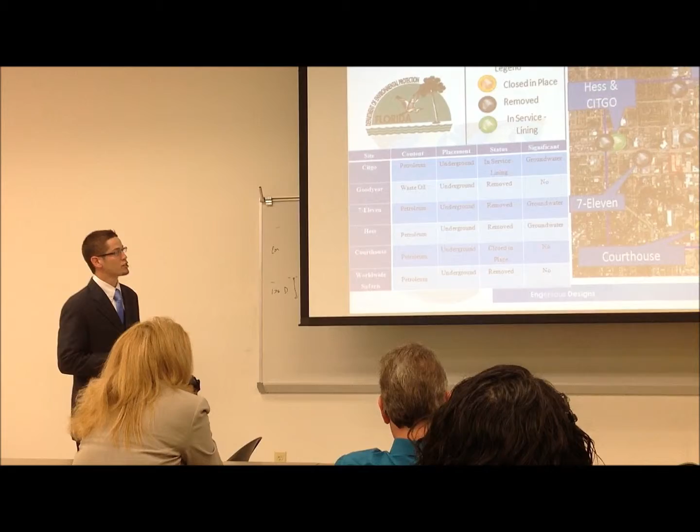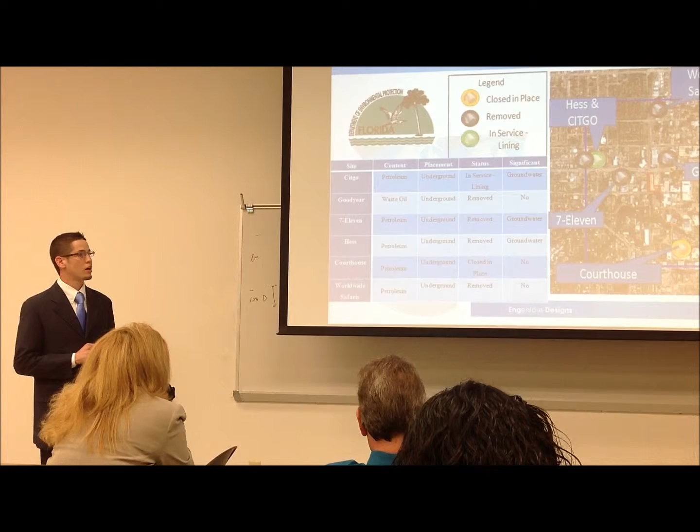During the search of the state environmental records, we came across these tanks here: the Worldwide Safari, Goodyear, Courthouse, 7-Eleven, Hess, and the Citgo. All these tanks, except the Citgo, have either been closed or removed. The Citgo gas station is currently using their tank, which has been lined.

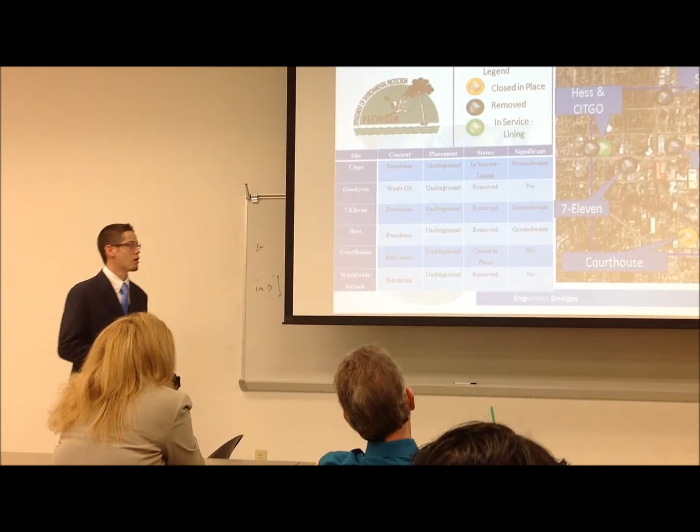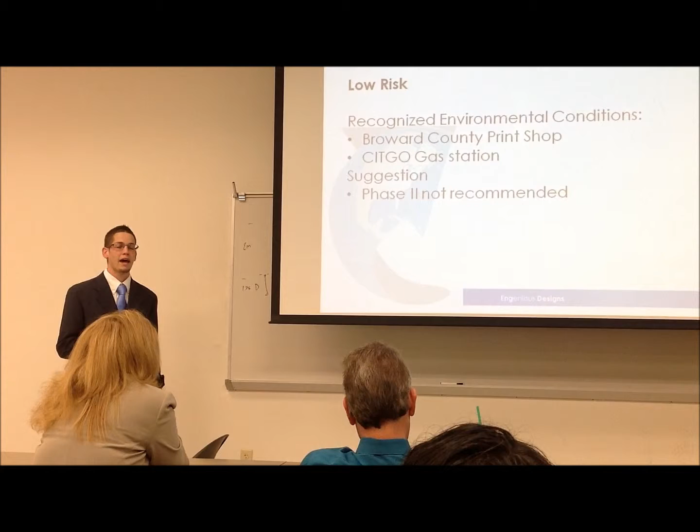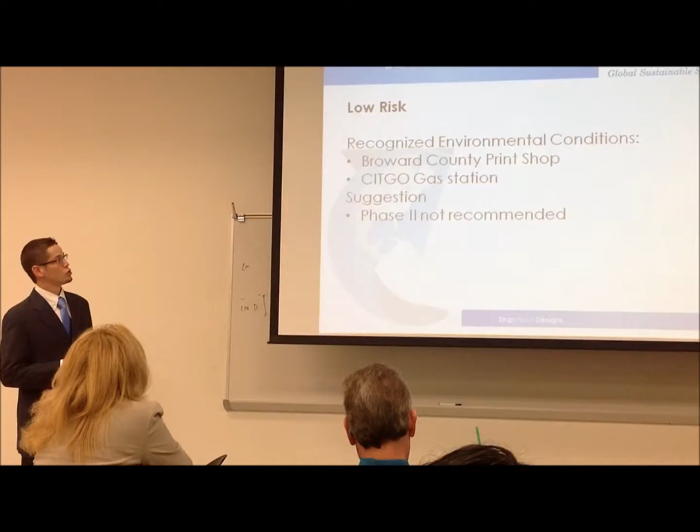So that is the thing we are concerned with, if the lining could somehow come off. In conclusion, we classified our site as low risk, due to the fact that most of the tanks that had leaked have had their petroleum products dissipate in the soil. We chose to recognize as environmental conditions the Broward County Print Shop and the Citgo gas station, for its diesel generator and for the Citgo gas station having its lined tank. Our suggestion is to not proceed with phase 2.

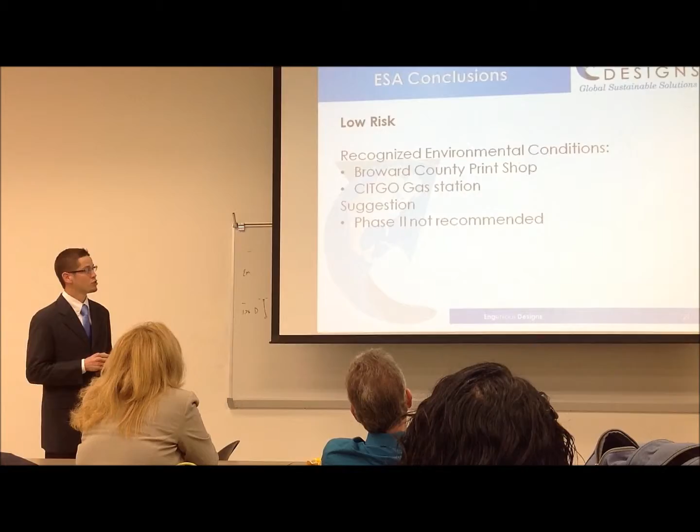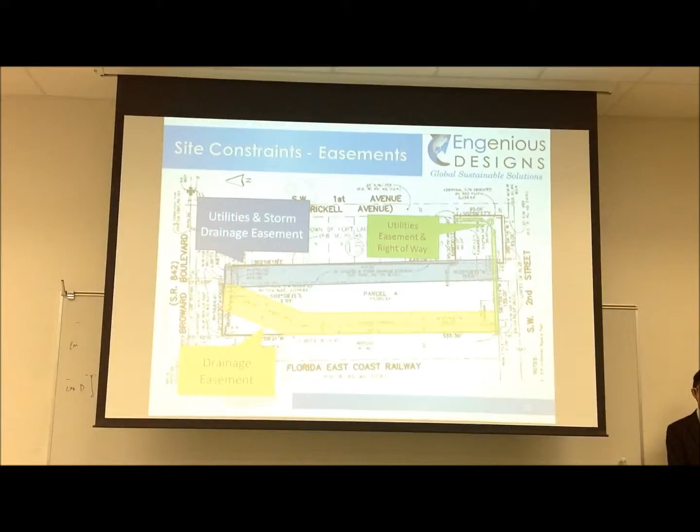We have looked into the site constraints of our property, and the main site constraints are the 3 easements. As you can see in blue, there is a utility and storm drainage easement located on the east edge of our property. There is also a utility easement and right-of-way located on the south and east of our property. The last one is the drainage easement located on the west edge of the property, shown in yellow, and this easement requires at least 25 feet clearance.

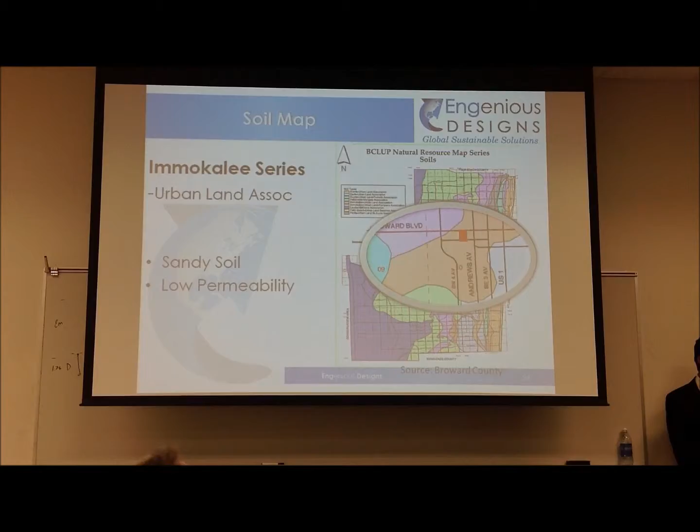For the existing site conditions, we have looked at the maps of soil, stormwater, water main, and sanitary sewer for our site. On the soil map, as you can see, we are located in the red box. We are located in the Immokalee series, which is a sandy soil of low permeability.

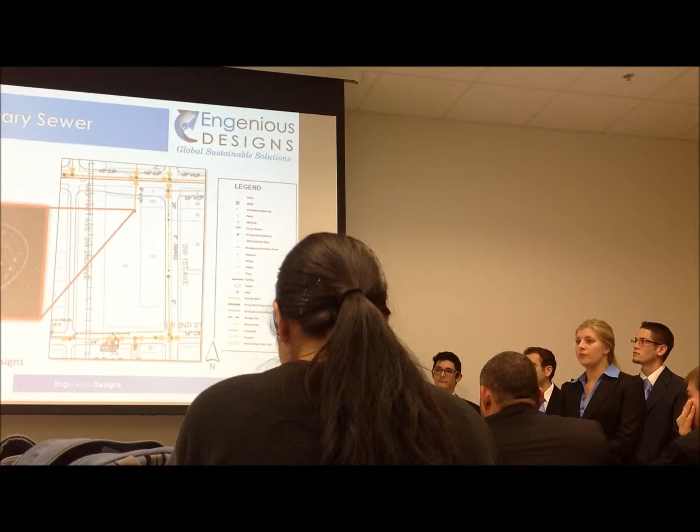For the sanitary sewer, we also pulled up the utility map of Fort Lauderdale, and the sanitary sewer runs directly north and directly south of our property. There's a picture of the sewer manhole taken during the site reconnaissance.

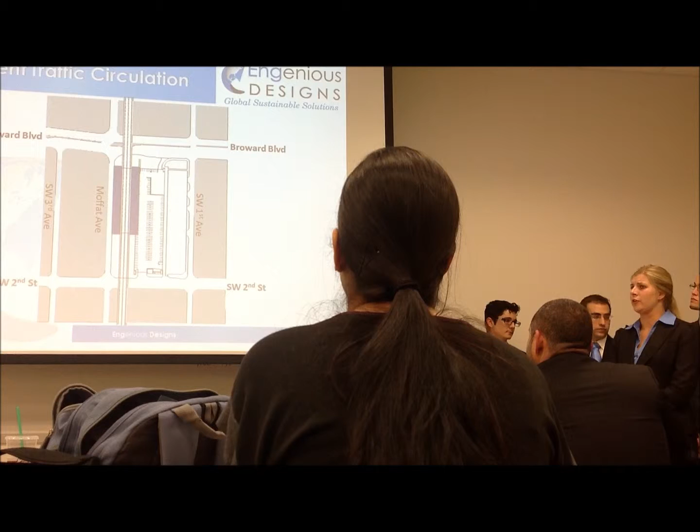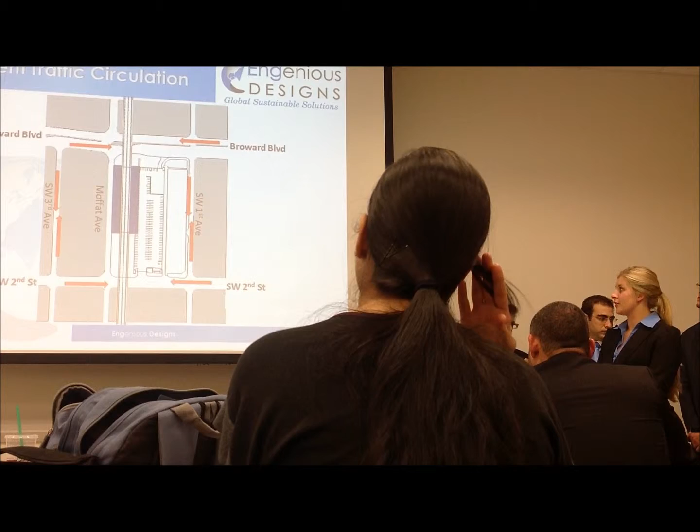Let me tell you a little bit about our traffic circulation around our site. As you can see, all the main roads run in both directions, except for Moffat Avenue, which is a one-way street that runs only south.

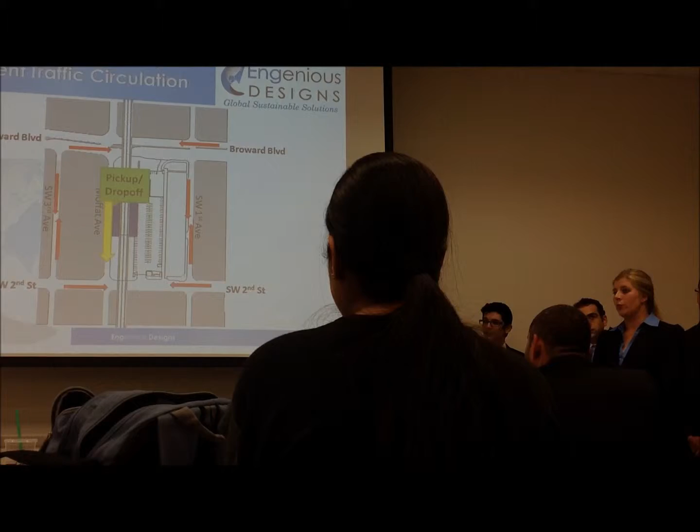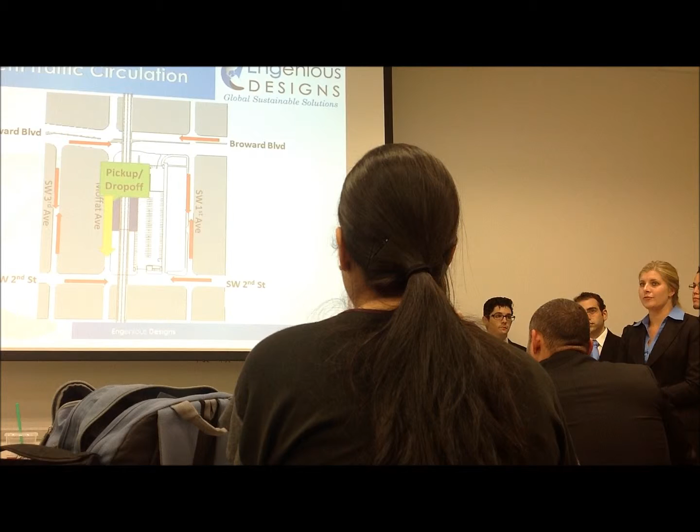This is a pickup and drop-off area proposed by us, located on the west side of the west platform. The direction of traffic on Moffat Avenue is creating an issue for the pickup and drop-off area, because once you're picking somebody up, you want them to exit on the right side of the vehicle. With the current pattern, they're going to exit on the west side of the drop-off area, which doesn't work and creates safety issues.

Another issue we have looked into is a turning pocket located directly north of the parking lot. When we turn to another slide, we'll tell you more about that condition.

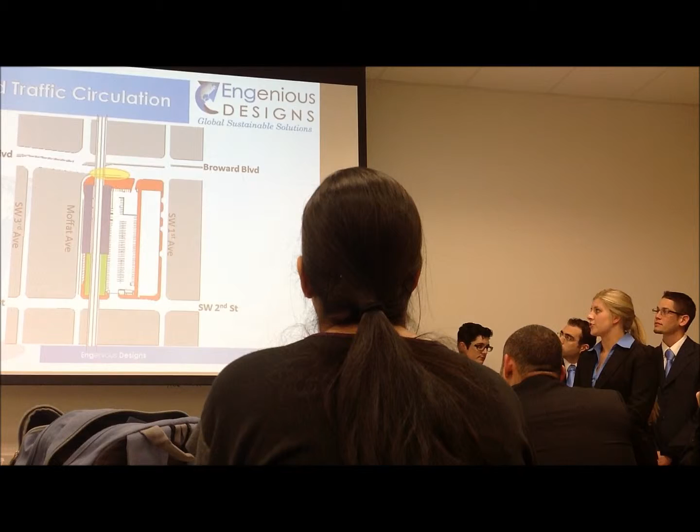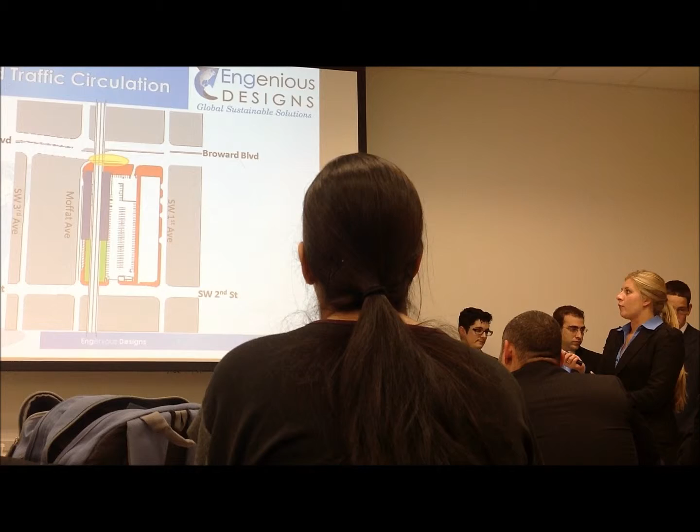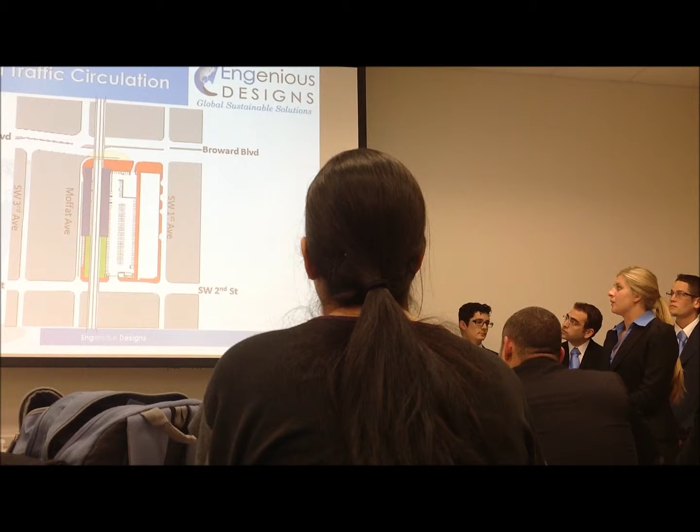There is a turning pocket that goes from Broward Boulevard into Southwest First Avenue. We are proposing to extend that pocket to essentially have a turning lane that goes from Moffat Avenue into Broward Boulevard. The reason is because we want to reroute traffic on Moffat Avenue so it could run one way north.

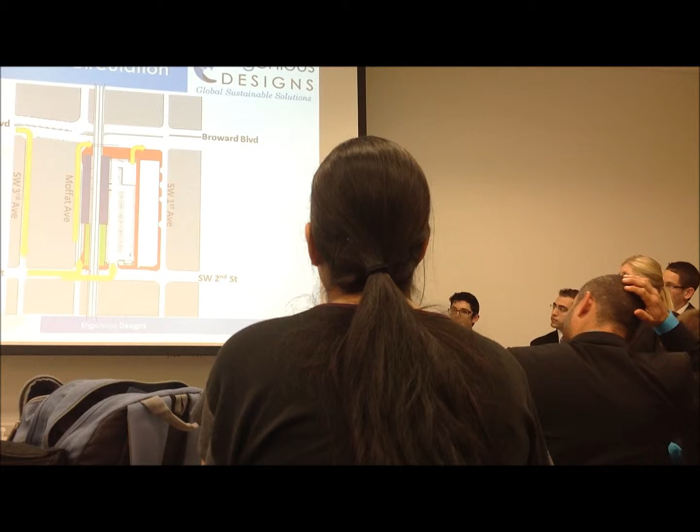That way, once you want to drop off or pick up somebody, you can go from Broward Boulevard into Southwest 3rd Avenue, Southwest 2nd Street, drop somebody off or pick somebody up, and go back into Broward Boulevard. Or another option is to access the garage and go onto Broward Boulevard Avenue.

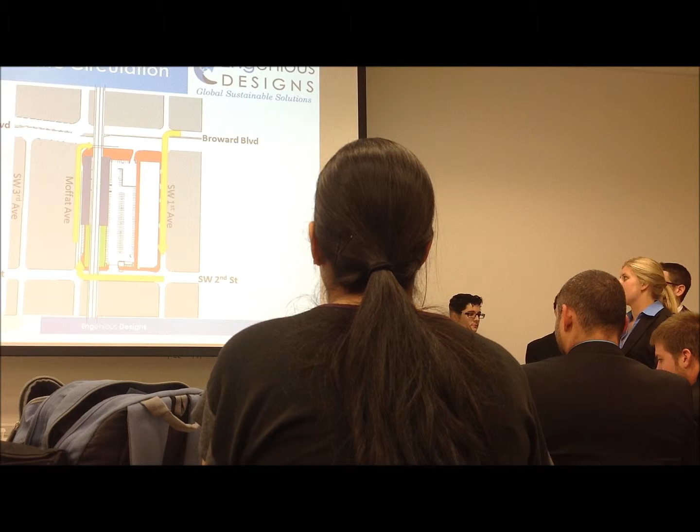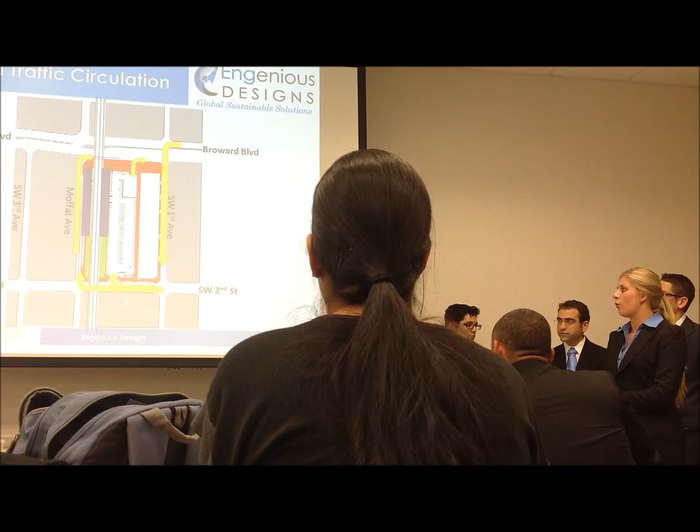Same thing for Broward Boulevard going westbound. You would have to go directly around the property to Southwest First, Southwest 2nd Street, and go around into Broward Boulevard, or go into the parking lot and go Broward Boulevard eastbound.

Now Joe is going to talk to you about the objective section. These are the people that we're going to be transporting. And as you can tell, they're very happy.

The morning peak is from 6 a.m. to 9 a.m., and the afternoon is from 3 p.m. to 6 p.m. The reason it's a little earlier is because the government center usually lets out earlier. Government employees tend to finish around 4, sometimes leave earlier, so we'll be expecting it around that time.

During the average 15 minutes, we expect around 200 occupants from the current ridership. In the future, we expect a little bit more, probably around 600 to 800 during that peak 15 minutes.

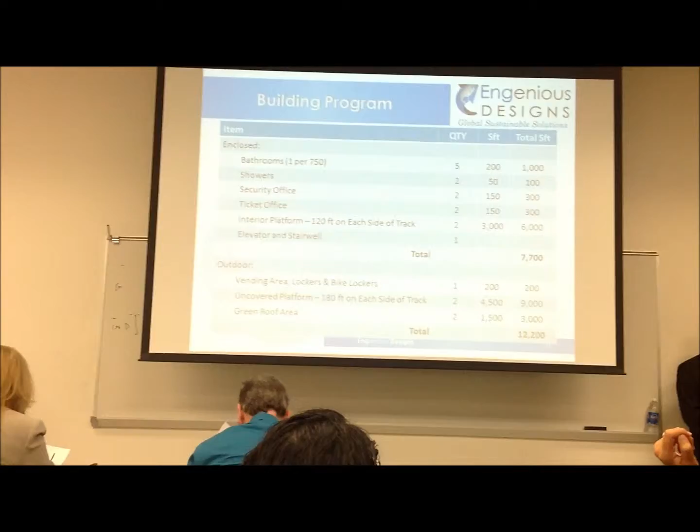Our building program consists as follows. We'll have plenty of bathroom space for the occupants since when you're coming out of a train, especially being a destination station, a lot of people may be just going through their coffees, so they'll need to get into the bathroom fairly quickly. There will be 5 bathrooms, one of which is a private bathroom for security personnel and those working on the property.

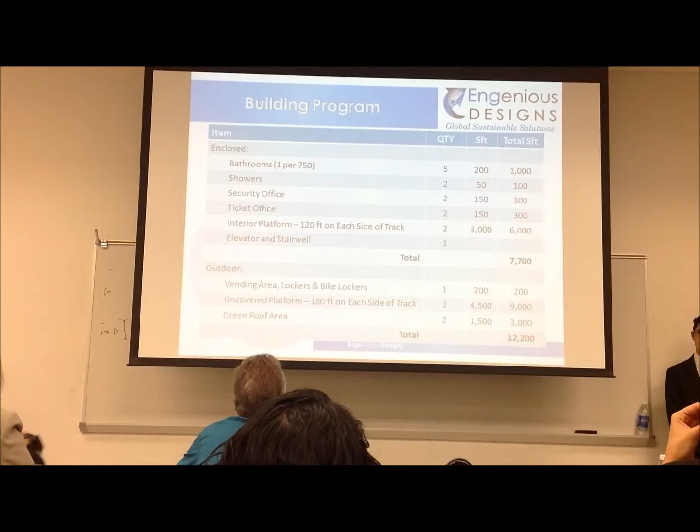4 of the bathrooms, 2 and 2, will be male and female. We are also going to try to include showers into the plan, a security office, ticket office, interior and exterior platform, an elevator and stairwells, and outdoor areas as well.

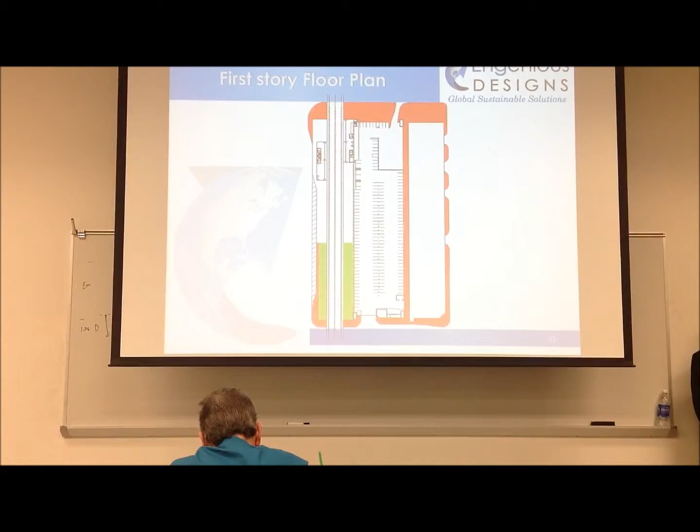This is our current plan of the first floor, and in red are all the walkways throughout around the property, and in green this is just the grassy area. So this box right here is kind of where we'll be working on.

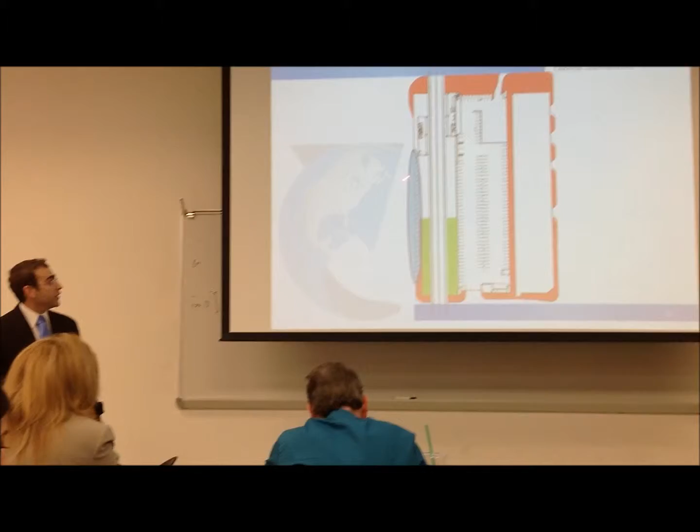This is the drop-off area that Paulina was talking about, and that's just right there on the west side, north facing up.